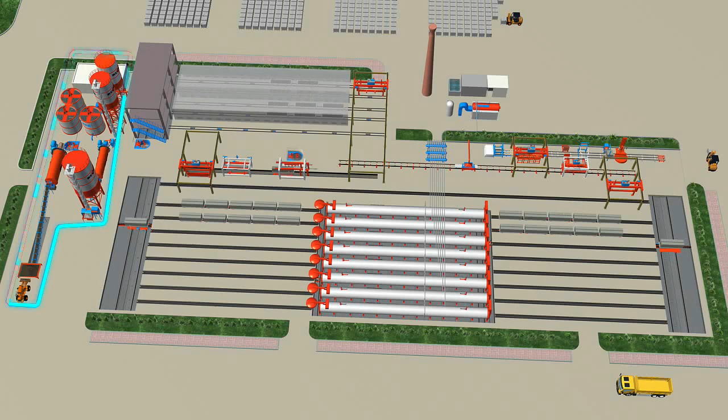AAC production process includes 7 parts: materials preparation and storage, batching, mixing and casting, pre-curing, cutting and grouping, autoclaving, packing.

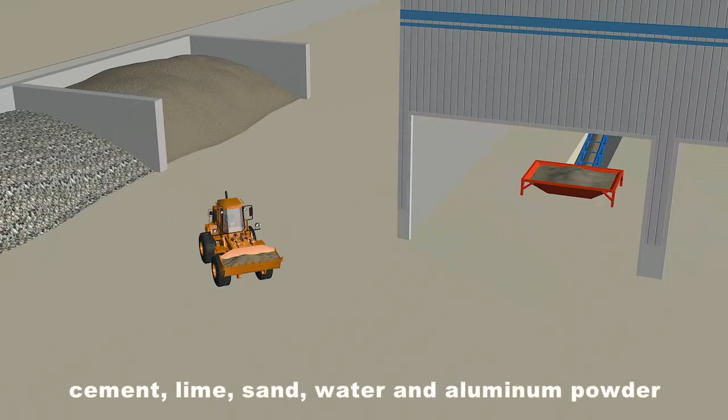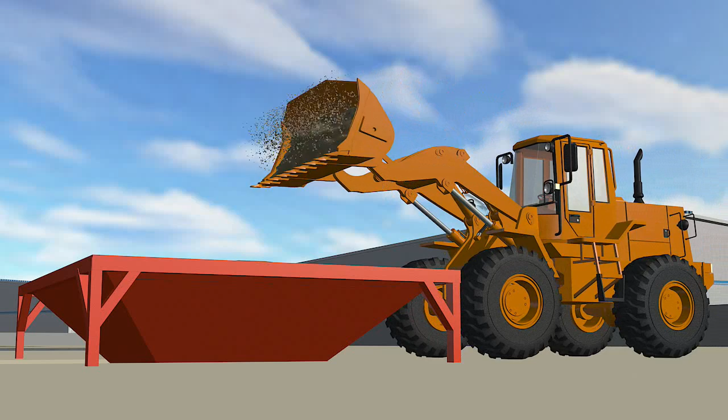AAC is made of cement, lime, sand, water, and aluminum powder as foaming agent. Firstly, the raw material sand needs to be ground in the wet ball mill.

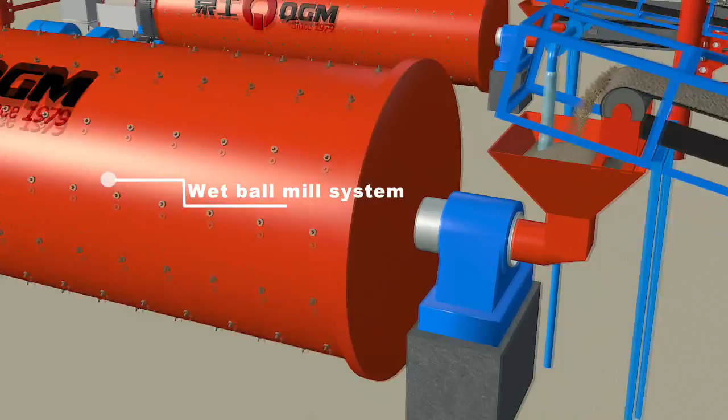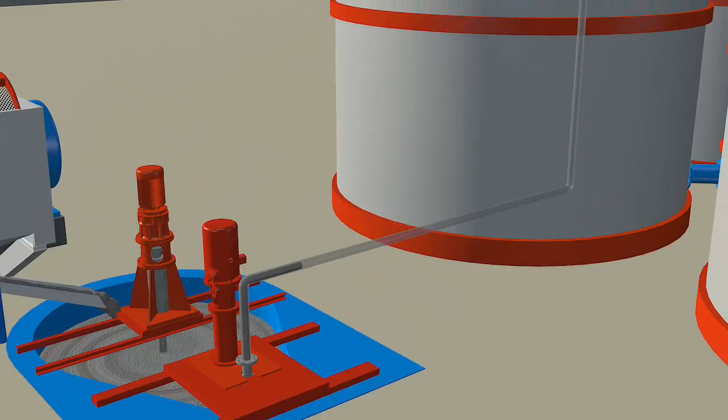The slurry is stored in a big storage tank and mixed slowly. The mixing keeps the slurry from settling.

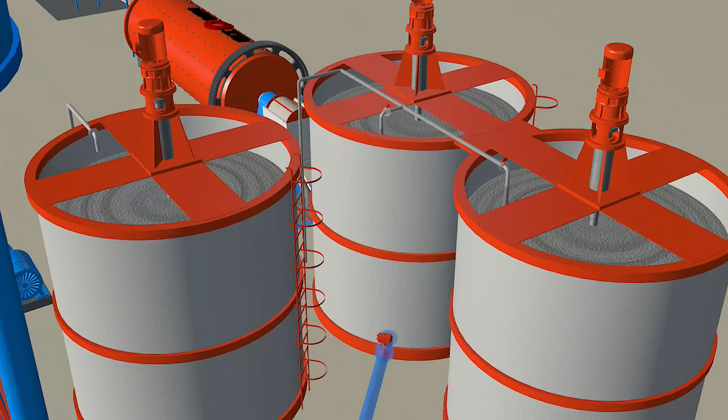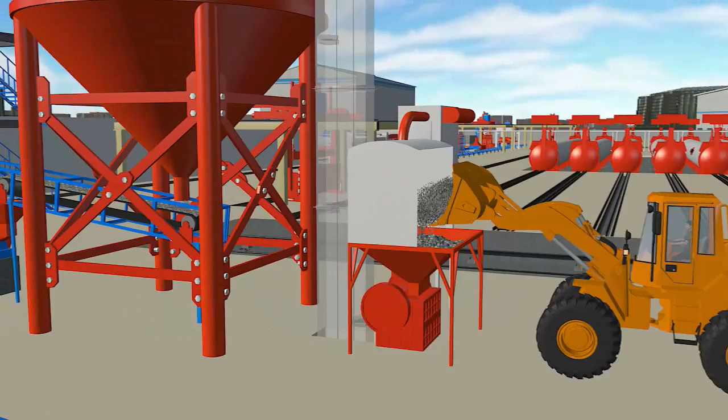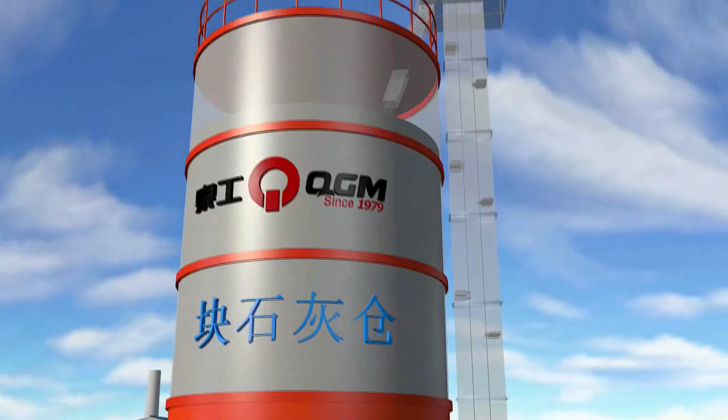The quicklime is crushed by the jaw crusher and delivered to the raw lime silo by bucket elevator. Then the lime goes to the dry ball mill for further grinding and is stored in the lime powder silo, waiting for next processing.

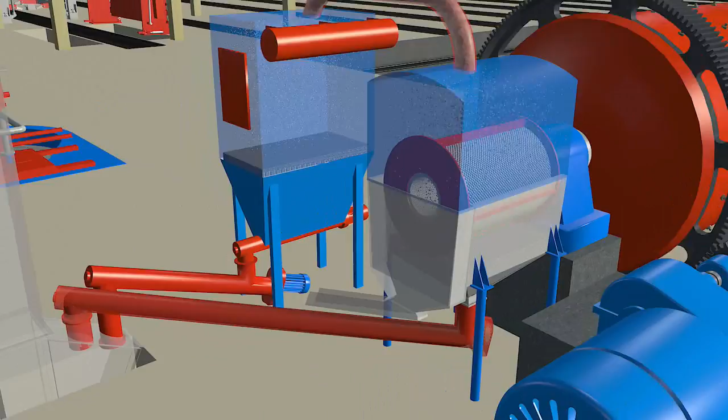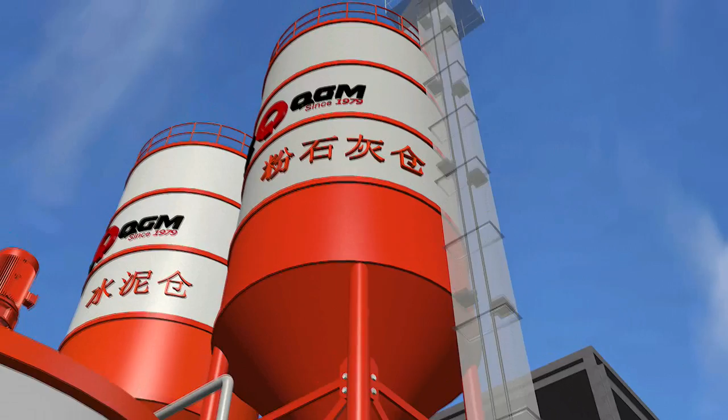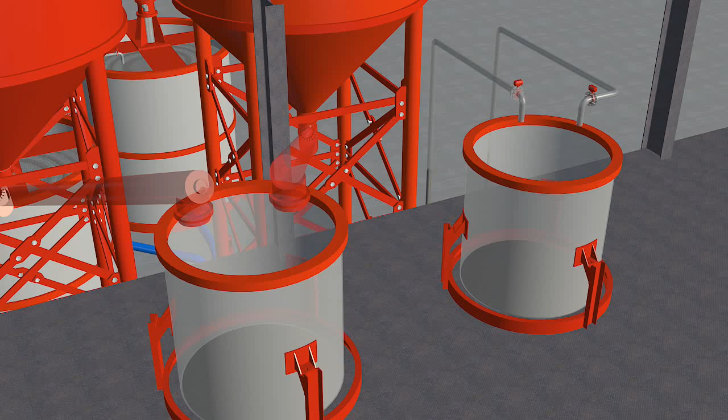The whole process of materials preparation and conveying is equipped with perfect dust removal equipment, which keeps the environment from pollution. After the preparation of the raw materials, the slurry, lime powder, cement, and aluminum powder or paste, which are respectively and precisely scaled, are discharged into the casting mixer with high-speed stirring. Then, the mixed slurry is poured into the mold for casting.

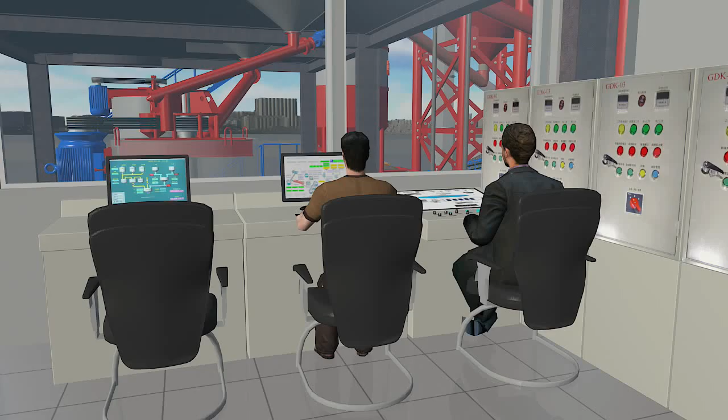The whole batching and casting system is controlled by fully automatic control panel and computer to ensure the precise weighing and efficient mixing, which serve as the key point for QGM's AAC equipment to get high-quality products.

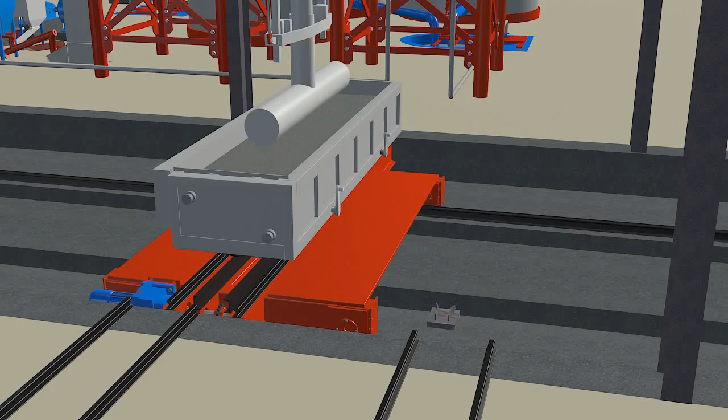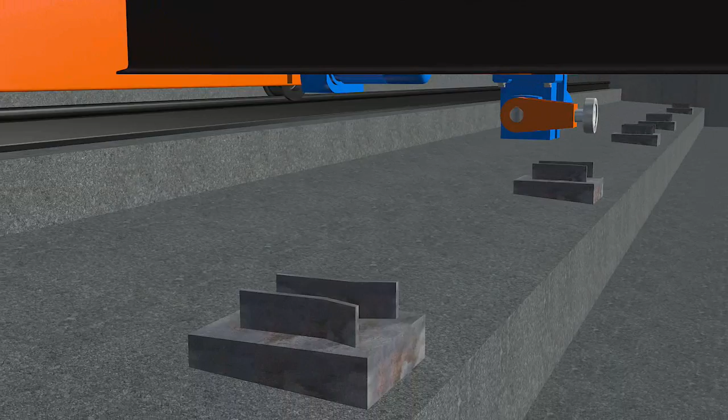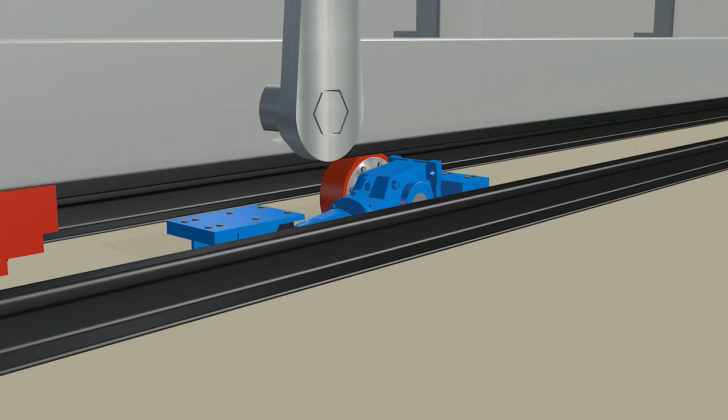The mixed slurry is having chemical reaction in the molds, and it begins to inflate as a result of the aluminum powder. Then, it is hardened by the hydration of the cement and lime, and finally becomes a foaming cake.

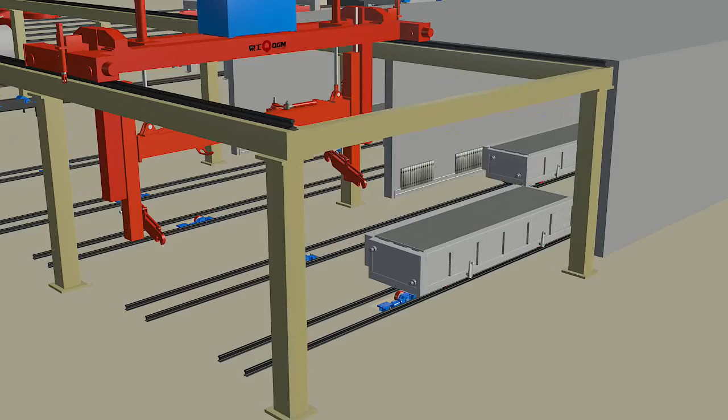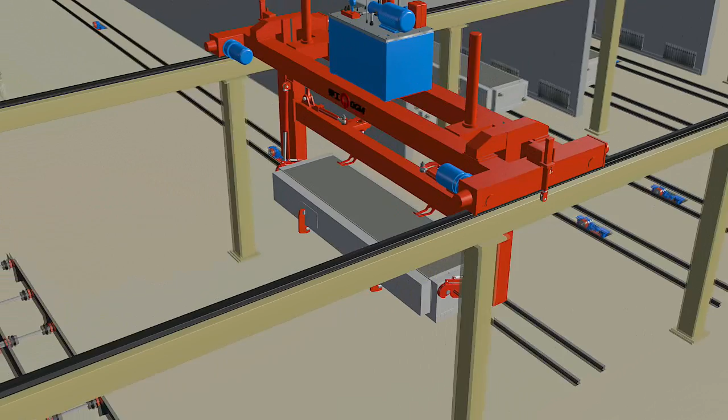The mold with the casting cake is transported to the cutting zone by a turning hanger with automatic positioning, and put onto the loading car after 90-degree overturning. Then the manipulator separates the cake from the mold.

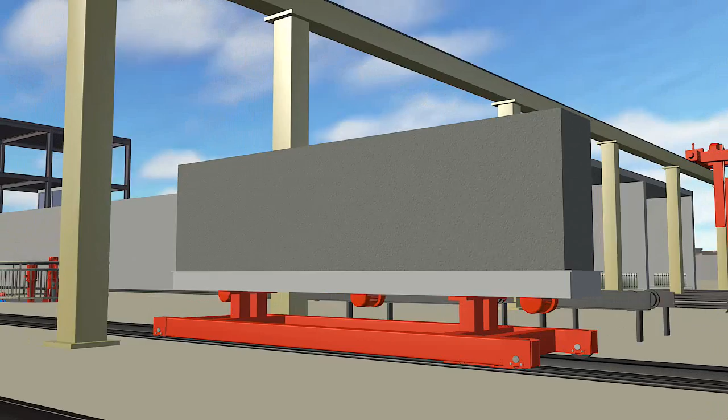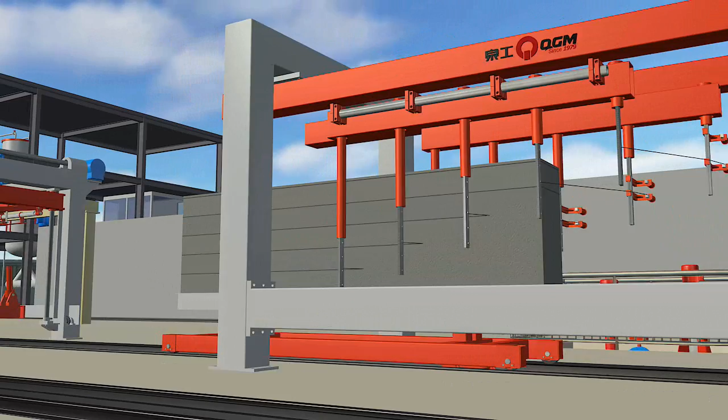After demolding, the cakes are being cut in the cutting machine. The cutting car with the cake goes through the vertical device for vertical cutting. During this period, the thickness is being cut by the cutting blade and horizontal cutting machine. Then the transverse frame lands top down vertically and the wires swing for the cutting.

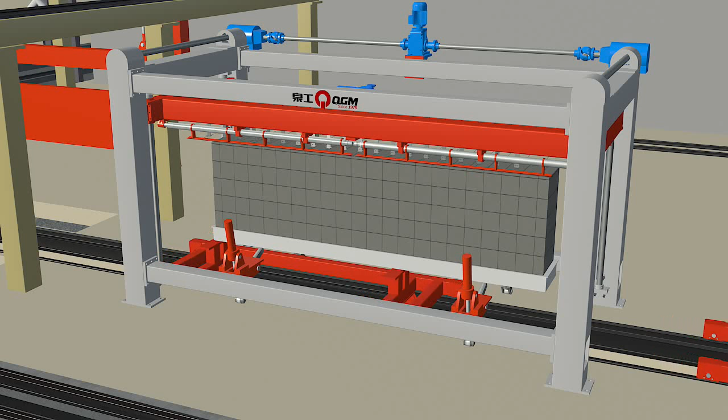The car replacement device starts after the cutting finishes. The oil cylinder of the car replacement device under the cutting machine uplifts the cake with the side plate. The first car goes back to the starting position for the new cake, and the second car replaces the first car to go under the crane of skinning and grouping device with the cake.

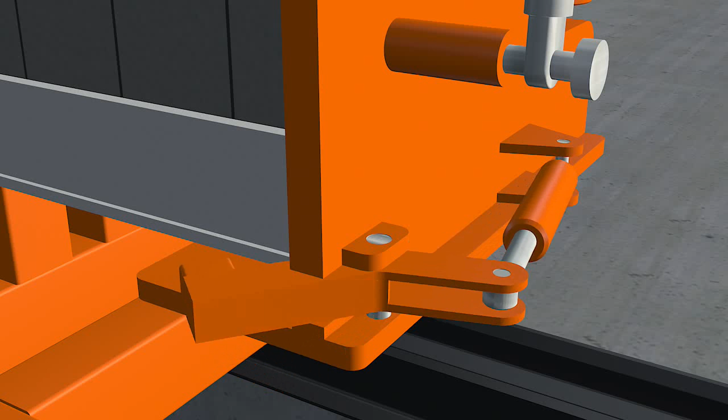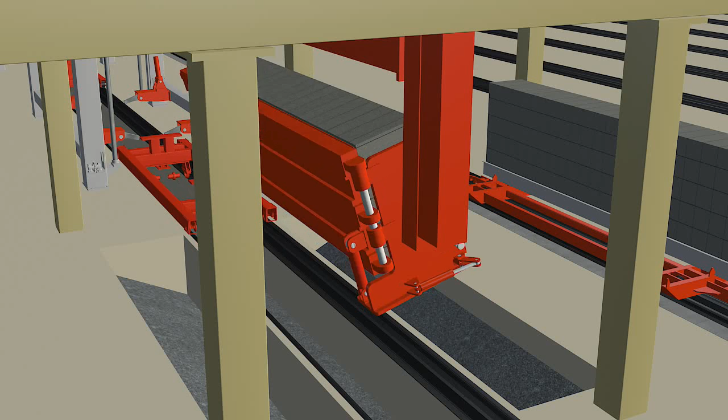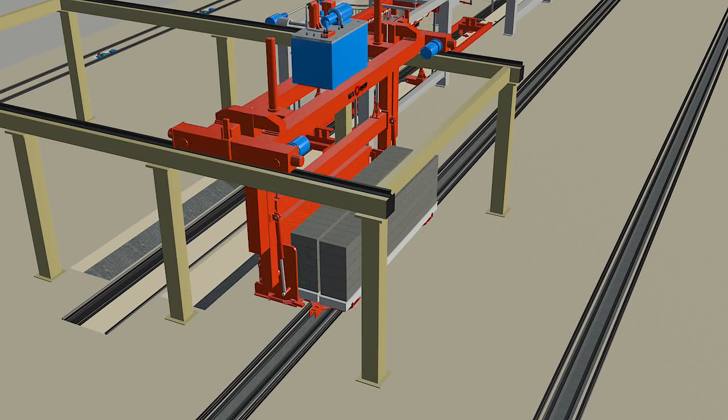The top and bottom layers of the wastes fall down when the crane uplifts and turns the cake. The crane transports the cake to the autoclave ferry car, and the ferry car goes into autoclave by the automatic tractor.

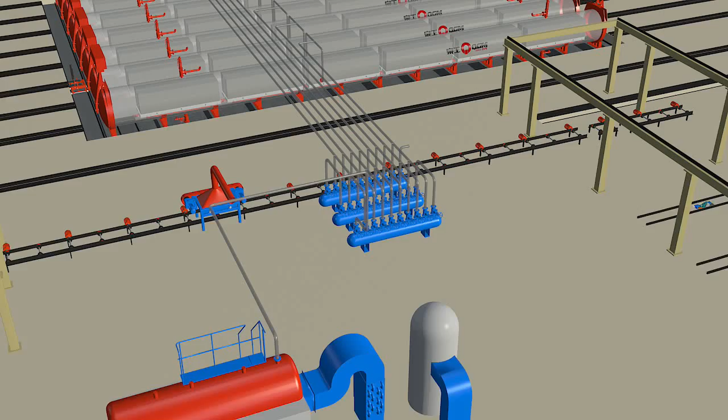AAC forms the unique crystal structure during autoclaving. The tractor pulls out the finished products to the ferry car after autoclaving.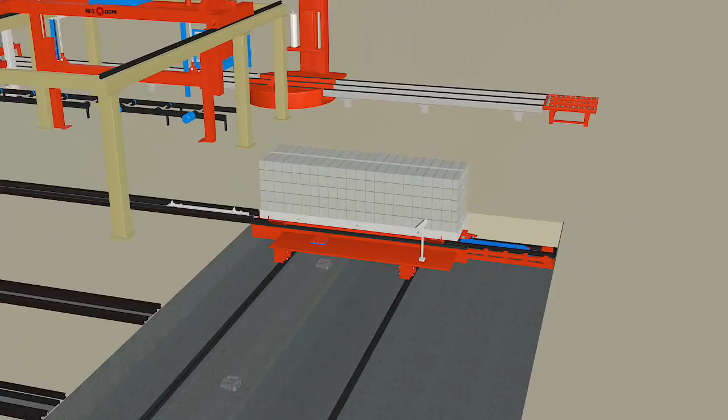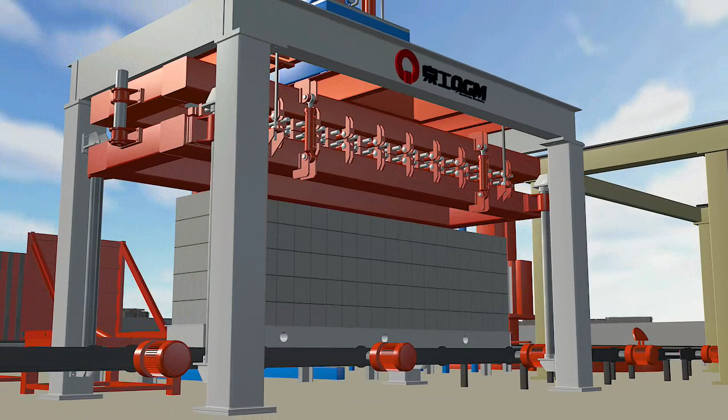Ferry car transports the finished products to the carrying crane, and the carrying crane transports the whole cake together with the side plate to the separating machine for block separating. The autoclaving car goes back to the front of the autoclaves through the orbit, waiting for the new cake.

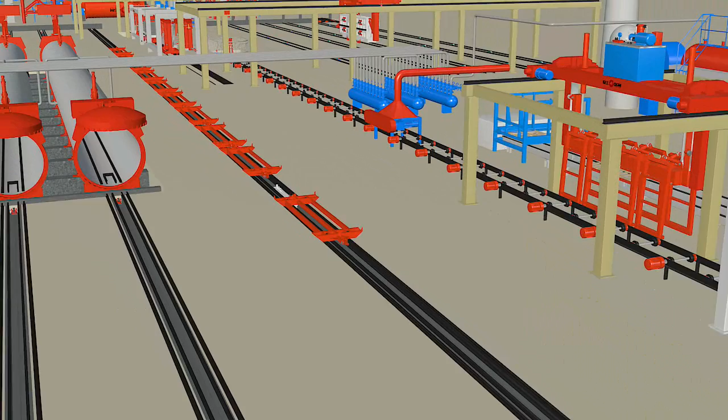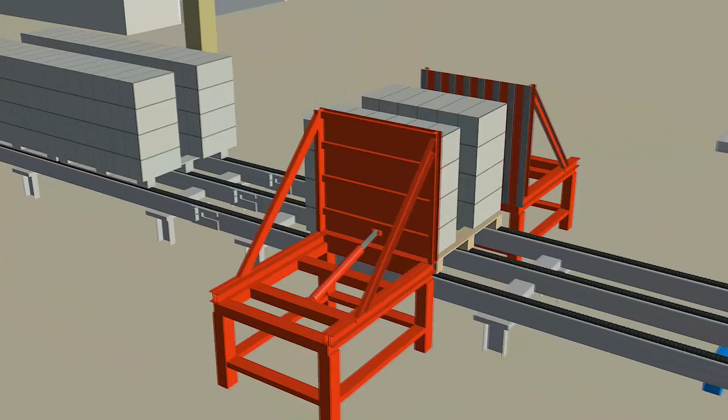The separated blocks with the side plate will go to the crane of the finished products. The jig clips up the blocks and transports them to the wooden pallets on the chain conveyor. Then, it comes to the packing procedure. AAC can be packed manually or automatically.

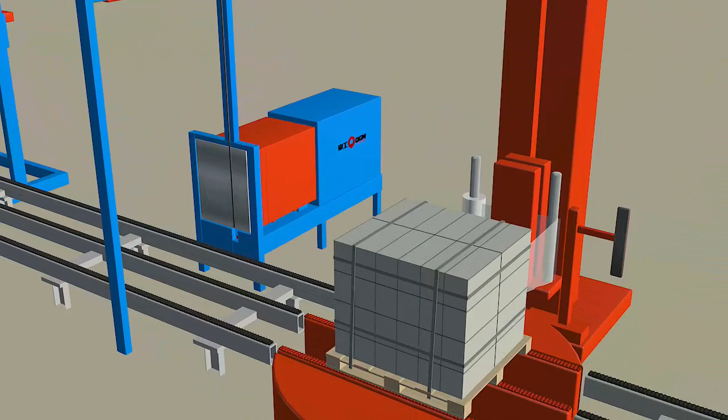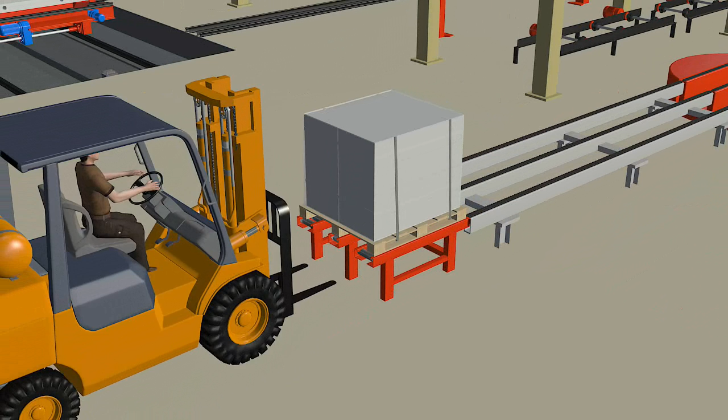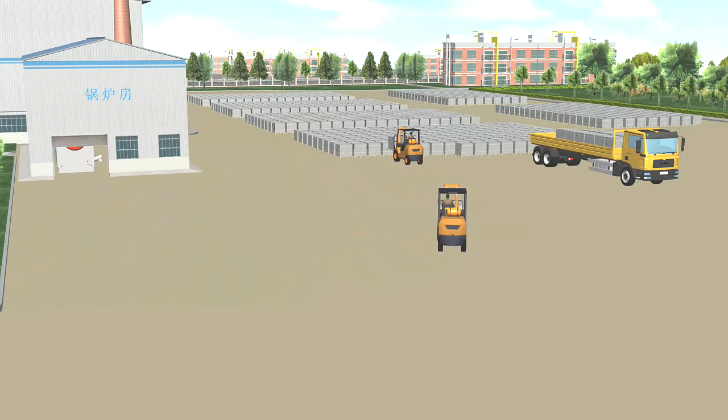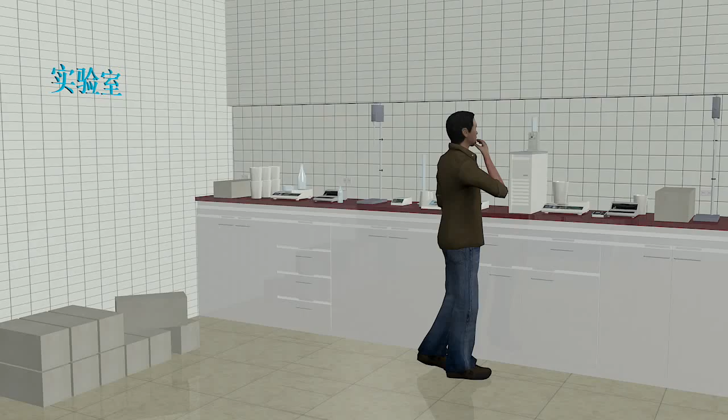Packing. The forklift moves the blocks to the storage area of the finished product, according to the specifications. All the raw materials and finished products are inspected and tested in the laboratory.

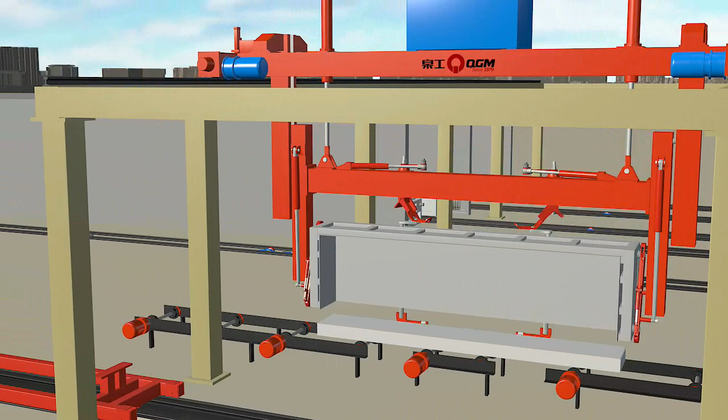After cleaning, the side plate will be recycled and returned back under the turning crane. The side plates are assembled with the empty mold and then oiled, and go back to the casting for the new production cycle.

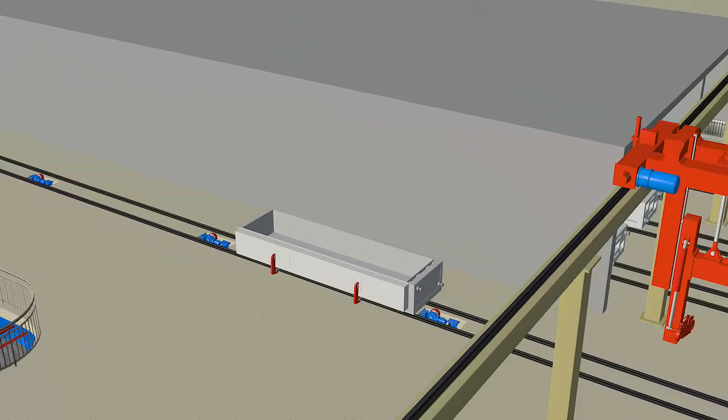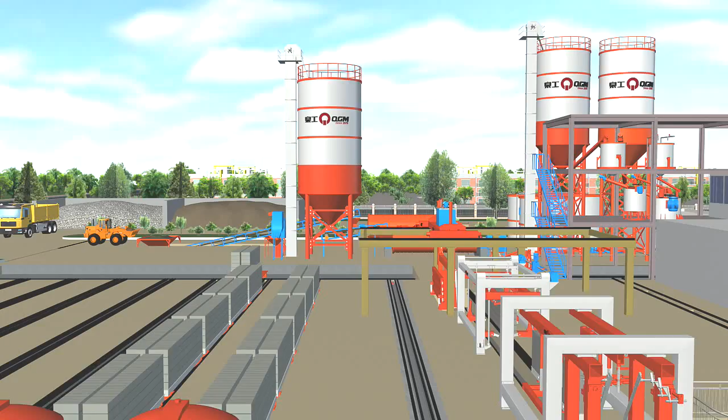We have environment-friendly and cost-efficient recycling systems, such as the top and bottom layers of the waste in the uplift and turn process can be recycled by the waste recycling system. The whole production line will continue to repeat the above production process, and different production output can be designed as per your specific requirements.